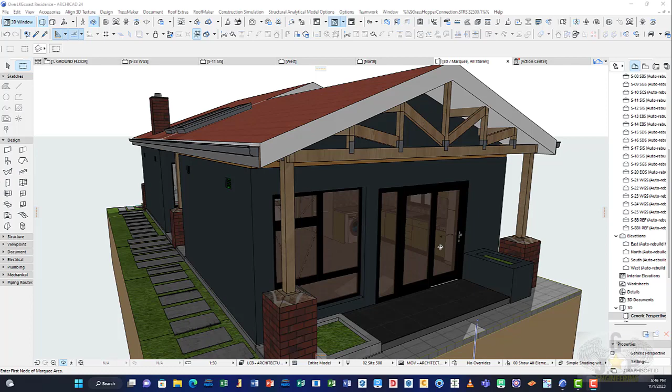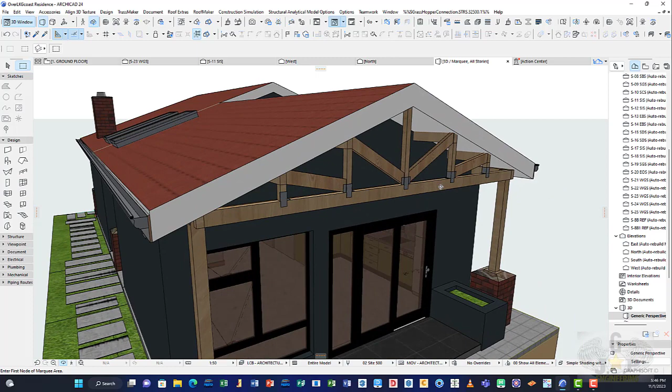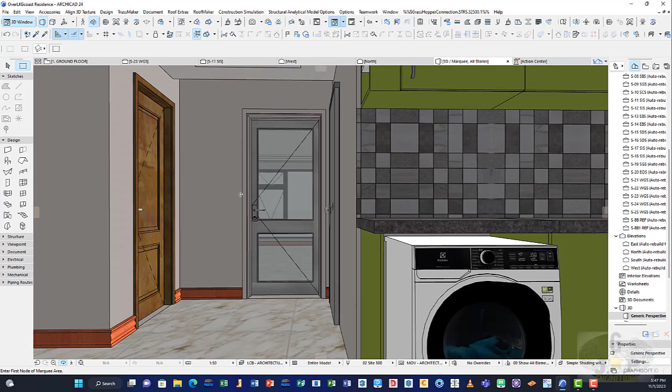Welcome back, we're gonna continue with what we started, continuing our modeling of this guest house. I just cut open a marquee here because it's a little bit bigger, but I cannot show you the full house because I signed an agreement with the clients. I hope you do not feel offended, but that's how the industry works. When the client sets up rules, you have to follow them. So that's why I'm trying by all means not to show you the main house. Though in some other videos, by mistake or inattention, you may see some part of the main house, but normally I was not supposed to. It happens, right?

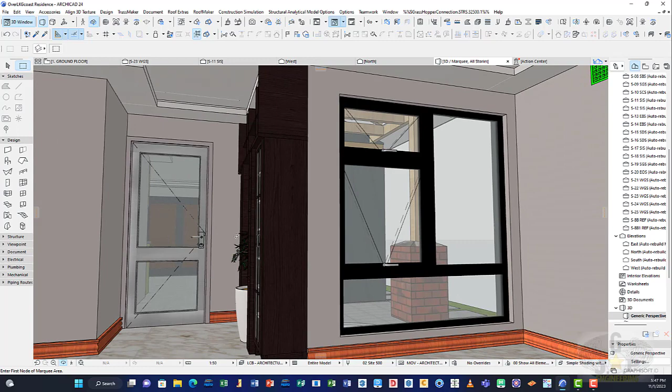So the agenda for today: we're gonna do the electrical work of this guest house. We'll work on the electrical first, then the plumbing, and after the plumbing, the mechanical. So it's more like the MEPs, right? That's what we're gonna do.

For that, basically we will not be using ArchiCAD, though ArchiCAD will be open and there. I'll be bouncing back and forth between ArchiCAD and another software we're going to use for the electrical, for the DCDs, design conception drawings. I use other software because ArchiCAD is mainly for the construction drawings. The work I do in other software might be for different reasons or different domains. I import those achievements into ArchiCAD, and from there I build up the construction drawings. That's how I do it.

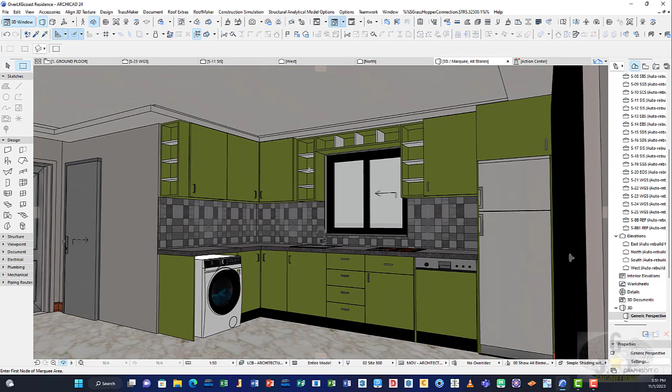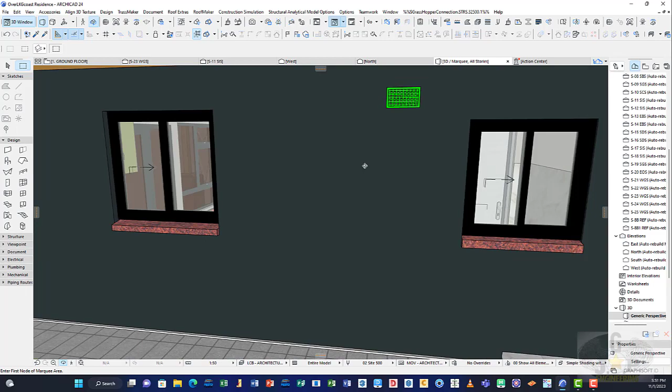So we're gonna use a different software for our electrical work. I can do it with ArchiCAD, but for personal reasons, and because of preliminary drawings and different changes that can occur, I'm preventing extra jobs from happening. I'm reducing the amount of work I'd have to go through using ArchiCAD alone, along with coming up with modifications. So I'm definitely avoiding that.

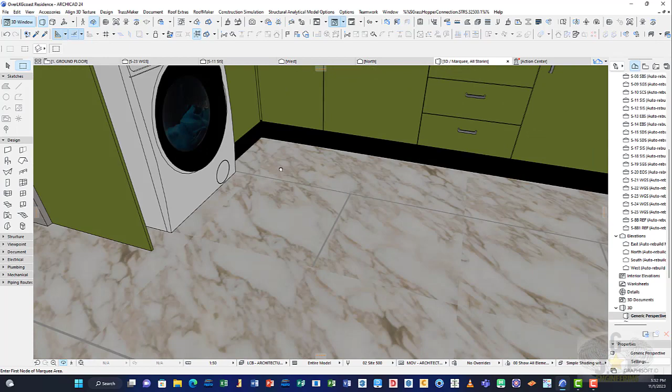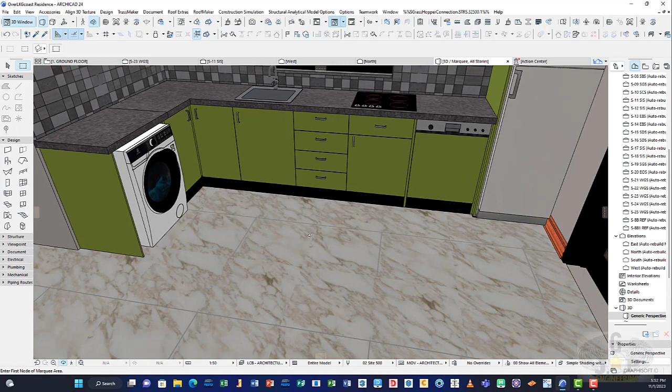Even for this kitchen, as you're seeing right now, this is an L-shaped kitchen. Just for the sake of it, it's not gonna be like that because I've already decided to add a small counter here, giving it a peninsula shape, a G-shape. We have six different kitchen shapes: single, double, L, U, peninsula, and island. So I made that decision in ArchiCAD, meaning I have to do the modification there. But if I had made that decision in another software first and come to a final decision, it would be harder to come into ArchiCAD and say I want to modify something. Because I haven't done it as a preset, now I'm forced to do it here. If I had done it before, it might still occur, you never know, one way or another.

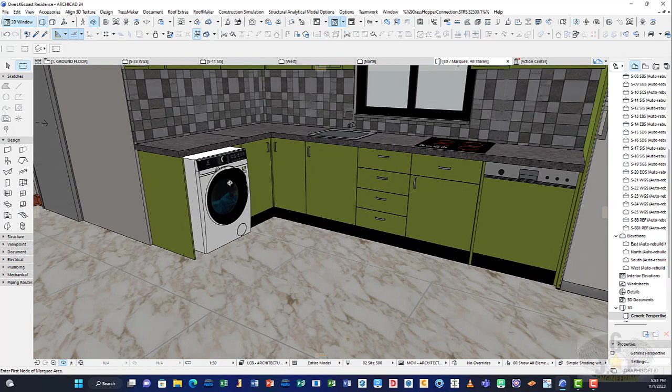But it's not the end of the world, we're gonna do it. So as I said, we will not be using ArchiCAD to do this job.

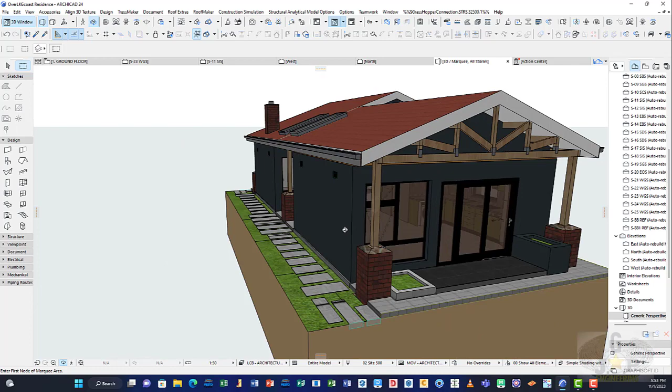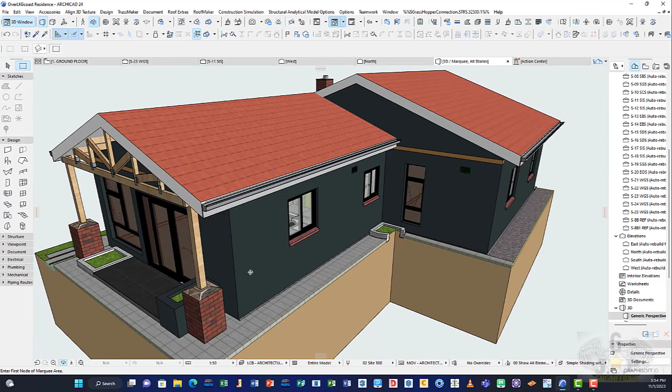We'll be using EdrawMax, this software right here, where my cursor is pointing. We're gonna go through it, and I'll present the software to you. For each and every software that I use, I'll explain to you its advantages and why I use it. Then we'll go all the way to the layout so you understand. Maybe you'll end up using the same software, maybe it will be a good reference for you, maybe you'll like it and start using it. But for me, I guarantee you it works. So without further ado, let's dive into it.

So what I'm gonna do is come on my taskbar here and click on this icon. It says Wondershare EdrawMax. The company is called Wondershare and the software is EdrawMax. They came up with two different types of software: EdrawMax and EdrawMind.

I'm gonna talk about it and try to explain the difference between EdrawMax and EdrawMind as we go along. This is EdrawMax, and here we have EdrawMind. I use both of them, they are really helpful, and I hope you start using them.

So what I'm gonna do is click once on the EdrawMax icon. The thing is, EdrawMax is an office software — I don't mean a Microsoft Office software, I mean it's a multidisciplinary software. It incorporates a lot of disciplines. To me, I see it as the upgraded version of Visio, the Microsoft package.

It really encompasses different domains of Microsoft, like PowerPoint, Word, Excel, Publisher, Visio, and Microsoft Project. So all that Microsoft Office put together plus Visio, upgraded, gives you EdrawMax. When you put the Microsoft Office package together and add Visio, it gives you EdrawMax — it's kind of the upgraded version of the Microsoft package.

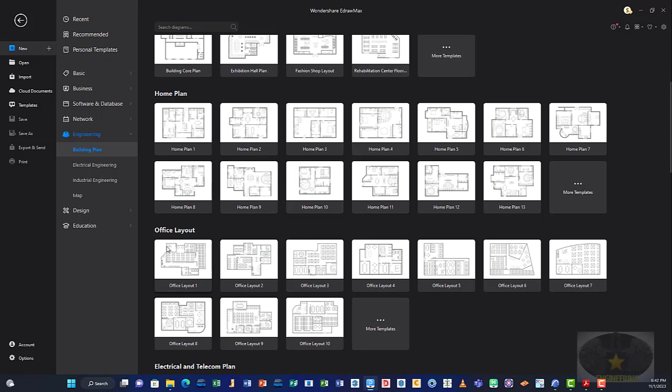For each and every one of them, there's a template. For instance, for the floor plan you have these templates, you can look through them. For the home plan there are different templates, for the office layout there's a template, for electrical and telecommunication there's a template, and for the seating plan there's a template. So for each workflow there is a preset template for you to go through and maybe use or not.

That's something new. For electrical engineering, it mostly tells you the basics of electrical — you have circuit and logic, industrial control systems, and different systems. It's mostly a mix of electrical and electronical work. If you've done electronical work with different electronical components, you can still use it, and you can even do an industrial control system with a motor.

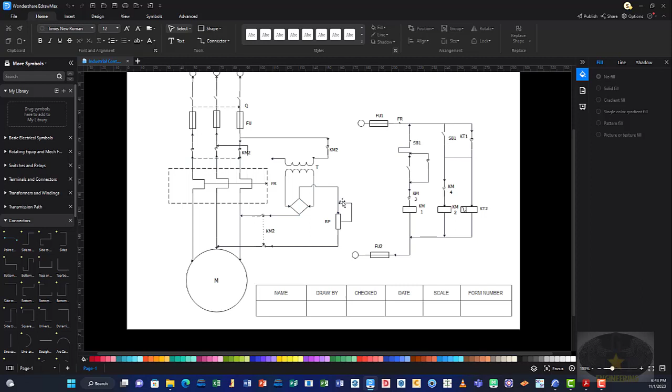Let me open this one and let's see together how it looks. So you can do something like this — I remember doing this with E-plan or AutoCAD electrical, doing something like this. But in E-plan, I wonder if you can still do it — something like this, using the contactor.

So there's a lot to explore with it. You can explore a lot with it. I guarantee you it's a good deal — it's definitely worth it. We're just gonna close it and go back to home. So now we're back, you can do a lot with it, definitely a lot. I haven't explored every part of it, but for what I've already used, I assure you it is something worthy of using.

There's even the map feature — you can create the directional map or the geo map, the 3D directional map, the subway map. So you can realize it's so powerful that I cannot underestimate it. It's something really crucial, and as you use it along the way, it's definitely going to help you for your next project.

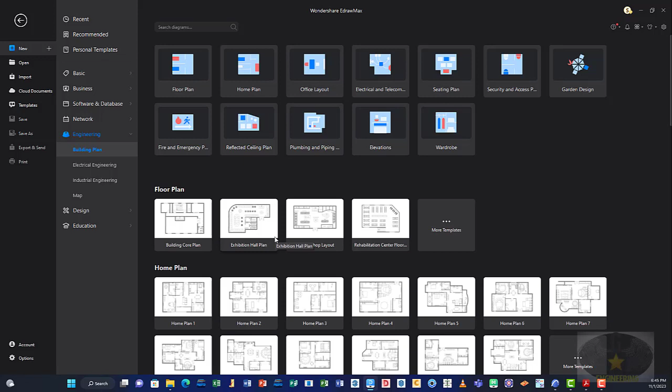So what we're gonna do, I'm gonna go back to building plan. I'm not gonna pick any template — we're gonna create something new. I'm gonna hover over electrical and telecommunication plan here, and double click on it. It will open — so this is it.

This is our workflow, our working space here. We have the whole interface. This is a proposal — a workflow proposal by Edrawmax. So Edrawmax says, okay, because you have chosen the electrical workflow, this is what you get in your library.

You have your own library first — my library, you can see it's empty, there's nothing there. On top of that, Edrawmax gives you extra libraries based on the workflow you've chosen, like electrical and telecommunication. So you have this library right here, as you can see. Besides that, you have wall shell and structure for building walls, or if you want to import a DWG, a picture, or a PDF into Edrawmax, you can still trace it with Edrawmax walls.

It comes with doors and windows — you can see here we have one of them, doors and windows, and then the lighting part. This is Edrawmax, welcome to the world of Edrawmax. So you have the lighting library, the door and window library, the wall shell and structure, and the electrical and telecommunication library, which is filled with a lot of electrical components. This is what I like about the Edrawmax library — it's filled with a lot of components. You cannot miss it. There's a 97% chance you will find all the electrical components here in Edrawmax for your schematic plan. For the walls, some are boxy, some are polylines, and you have spaces — so this is it.

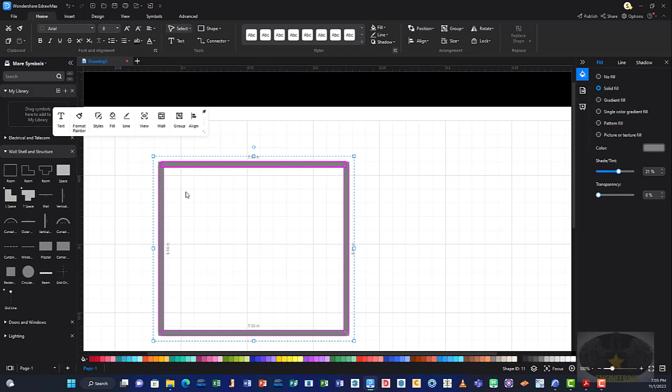So what I'm gonna do, I'm just gonna select everything and press delete, because I don't want it here. Then because I've pinned this whole thing, I'm gonna unpin it, then it goes away. So this is Edrawmax.

I've done an introductory presentation of Edrawmax to you - how the software is flexible, how it works, what you can do with it, how far you can take it. I definitely believe there is no limit to this software based on the job that it can offer. The good thing about it, we're going to put it to test - we will be using it, utilizing it, and see how far we can take it. Stick around.

I believe this was worthy, I believe you've learned a lot. I believe maybe in your next project you will consider Edrawmax.